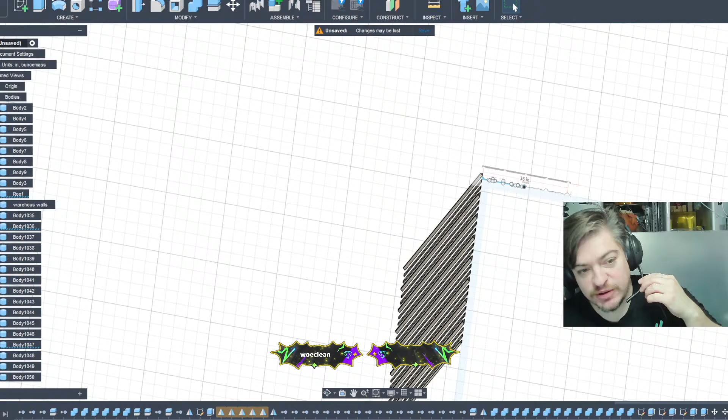We are working in Fusion 360, and I'm showing my screen here.

I have a client that wanted a copy of this building here. They make these buildings, let me pull up the webpage here. They make these corrugated metal sort of shed warehouse things, airplane warehouses possibly, I'm not sure. They want me to make it in 3D so that it can be 3D printed. Now, their website has a 3D render viewer thing, and unfortunately my HTML skills aren't that great. So when it comes to seeing if there's any way of extracting the render that's already there that can be manipulated, I don't know how. So that's something I won't worry about trying to make, just because I know I can do this, and this is what I'm gonna do.

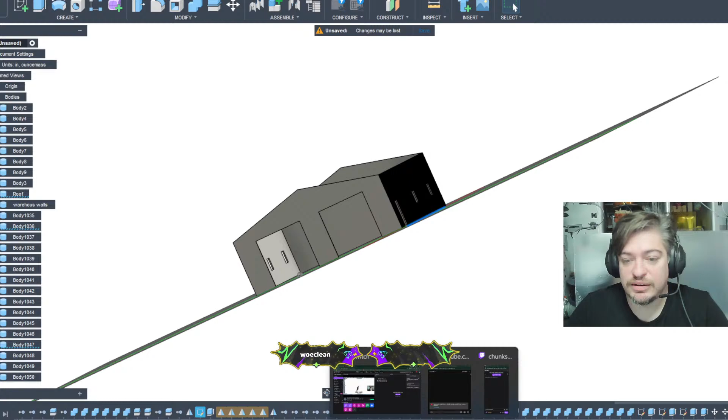You can see here, if we're looking at the interior, it has support beams every - I would say 40 inches. If the window down here is 36 by 36, then it's possible that this is 40 inches, so every 40 inches or so. So I will most likely, if that's what they want - again, I reached out to them and I'm waiting on a response - have to figure out the sizing of these beams. Now, the thing is, those beams automatically get populated into this 3D viewing.

As far as knowing the exact size of this, I'm going to have to figure it out. I'll have to count however many triangles there are, divide that by length and width, and use all sorts of little tricks to try to get the sizing correct.

So that's what we're working on. I believe the model they want me to make, they want to use as a display prop, so when they go to shows or conferences, they can have this on display to show the building they can potentially make for their clients. Of course the mini scale model isn't going to be exact, but it will be close.

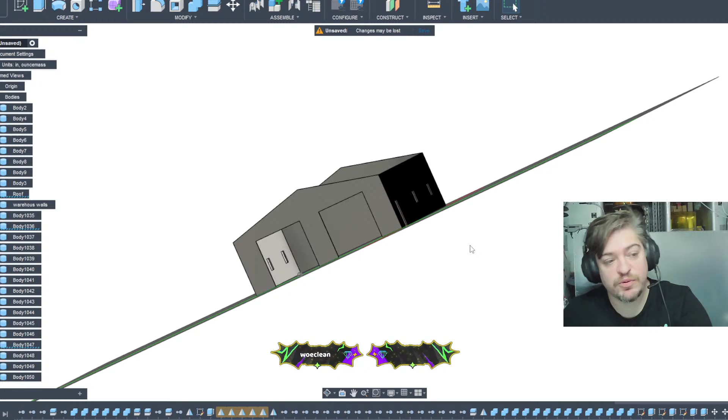So if I print this in one piece, I can print the walls at 15 inches, then print the roof possibly in two pieces, or just the roof by itself on the plate with some support underneath. Have that separate piece, glue it together, and for all the supports that are going to be in here, I can print those laying flat, one or two at a time, however many fit on the build plate, then manually glue them in. I think that's the way to go.

So there's not that much support on the interior. With 3D printing, support material takes up material and increases print time. Since I charge by print time and material usage, any way to mitigate the amount of supports needed will greatly reduce the final cost for clients. Removing supports is also a pain, so that's less work for me too, which makes things easier.

So just a little food for thought as you're trying to figure things out. That's what we're doing here.

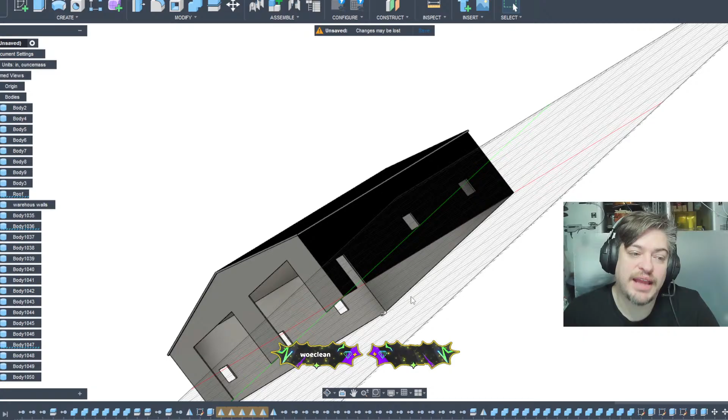Right now I'm adding the corrugated texture to both the front and back of the building. I've already added it on the left and right sides and the roof.

Here's a little trick. If I still have the page up... I don't, but I'll pull up the history here. We are looking at—it was Temu—corrugated roof panels. These are at Lowe's. I was looking at the 3D render, the 3D model they're viewing, and I thought, crud, this doesn't give me dimensions on that.

You can see it doesn't say dimensions in the description on the right hand side, it doesn't say it anywhere. So what I did, using the power of the internet, a Google search, I found Lowe's has corrugated roof building panels, or ribbed steel roof panels, and they give you the dimensions, but also the exact styling and sizing.

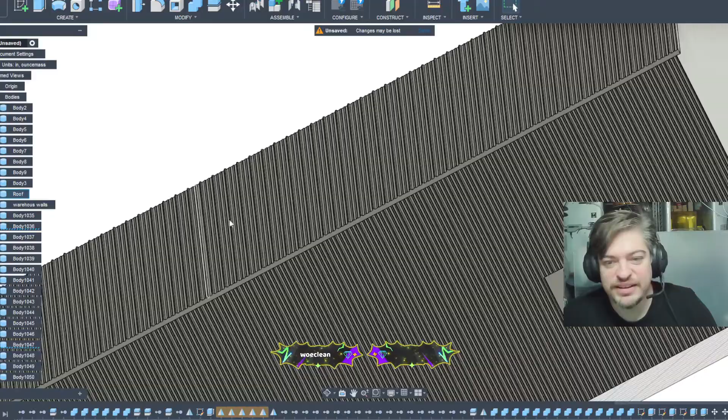Boom, baby. You can see here, I went through, got the corrugated dimensions from that site, put in the values, extruded, copied, duplicated, repeated, flipped, warped, made copies. After duplicating everything, I went ahead and fused them to the existing base that I had already sketched out. And now we have this.

So I did that to the walls as well, because the walls are also corrugated, right? So I still have to do the front and the back side.

Now, for visibility's sake, just so my computer doesn't explode. Look at that, can't even see. That's like when you have too much topology in a 3D model, and they're like, are you gonna use it for a video game? It's like, you can't use this for a video game, it has too much detail. The topology and the number of pixels and triangles on an object make the size of the object larger. The larger the object size, with more detail, the more computing power it takes to render that object.

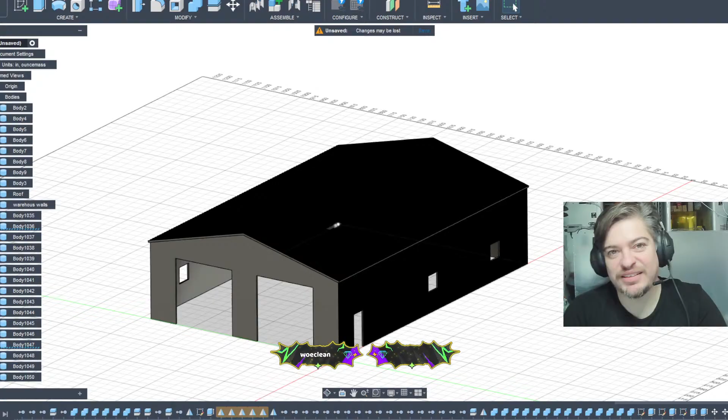So if something like this was in a video game, it would take a bit to load in the background, especially if it's just the background. That's why when you see video games, they have the flat image of what it should look like, right? And if you don't care, it's just a picture, just a drawing on a flat surface, and that's to mitigate things like this.

I know over the years, as technology gets more advanced, they've been working on Unreal Engine 5, figuring out ways to add more triangles without adding the triangles. It's a big thing, but that sort of information helps make things like this highly detailed for the future. Just imagine going into a video game and you can actually see shading on each individual panel, each individual little blip. That's big gazoogas right there.

So let me pull this print off my 3D printer and I'll start another one. I'll actually pull up a 3D printer view in the corner. But let me get that started here. BRB.

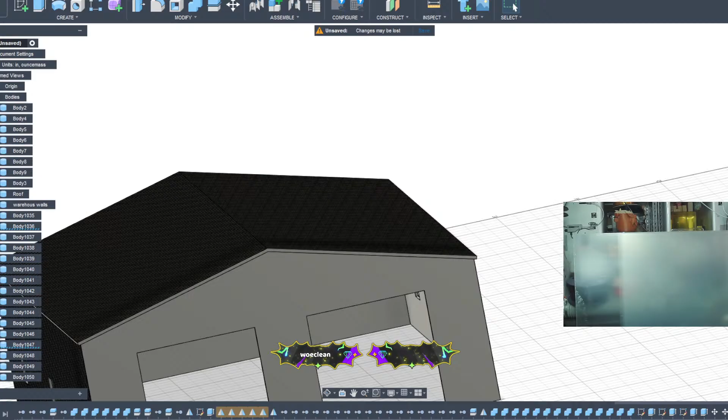I'm very limited on space here. Let me open this up, pull it over here.

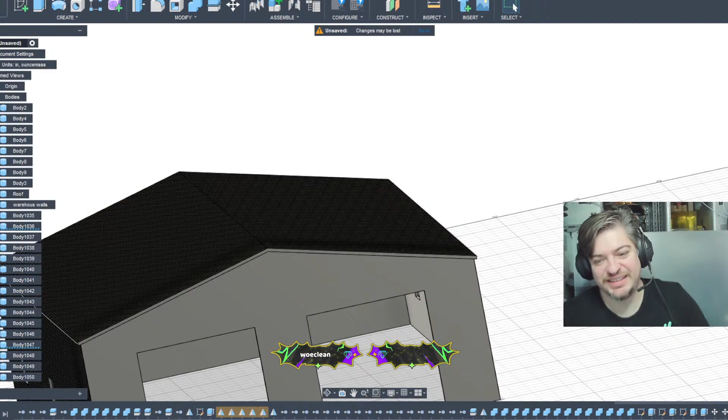All right, my bad, I got sidetracked. I was updating devices, that sort of stuff. Through all the updates, I've been getting a pop-up saying Windows sign-in request, and it's like, whoa, hold up, who? So I was just trying to get to the bottom of that.

What I have here in my hands, I don't like how that's printing. That probably needs force, but we'll leave it as is.

So currently on the printer, one of my older sisters, she had her house TP'd for Christmas. Somebody came and these boys thrashed her house with all her decor, and I think they were friends of the daughter. They scurried off, and in the commotion, they broke some of the lights that stake into the ground. So my sister came up to me and said, hey, can you make me more of these? This is the ground stake, and these are the copies I've been making. So right now on my 3D printer, I'm currently printing some more of these. Let me pull up the printer view here.

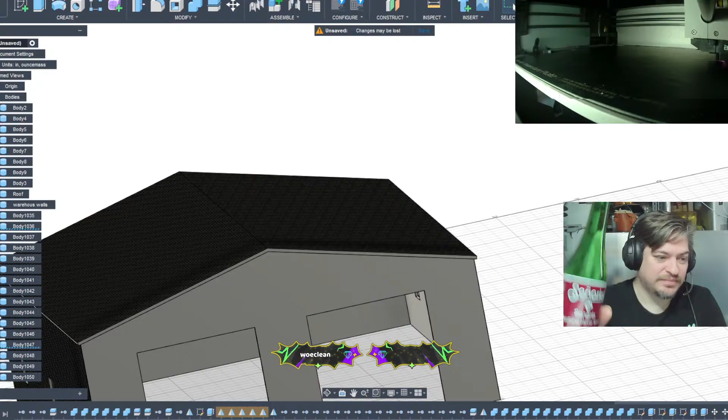I'm a little tired, I haven't had any caffeine. I woke up and grabbed a soda. I'm drinking some sangria, Mexican soda. Growing up, every time we went to a taco stand in Mexico, it was either a Mexican Coke, Mexican Pepsi, Mexican Sprite, or this bad boy. It's got kind of a twang to it. My wife doesn't like it, she says it tastes too much like wine.

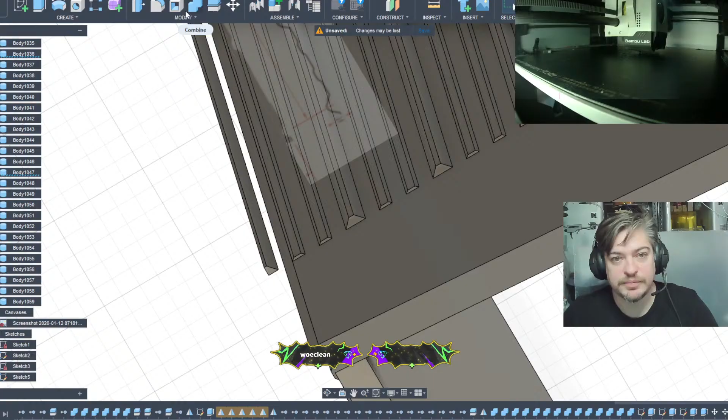Okay, so I can hide the roof and bring all these to light. And they're not even long enough, I need them to come all the way up here, so let's go ahead and do that. Come on, so extrude, start clicking on these faces here.

Okay, we want it as tall as that.

Oh no, that joined everything already. Well, I don't want to undo it, here's a little tricky thing to do. So if you look on the left side here, this wall body, the warehouse walls, are already fused into one.

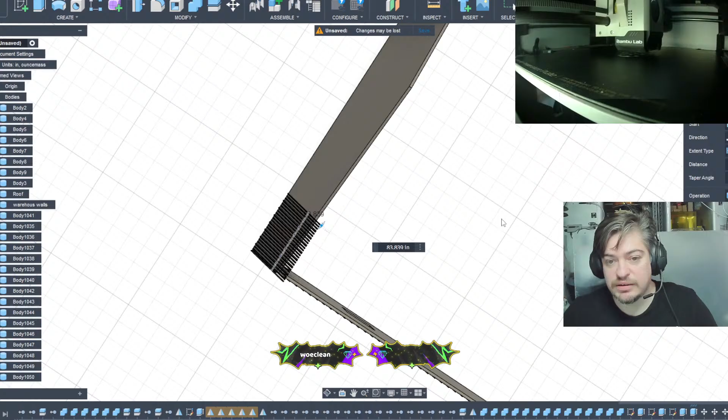Because they fused into one, what I'm gonna do is go back to my last thing on my timeline - it gets cut off because I don't want to show you my full screen - but if I click on my last job on my timeline and go to edit feature, it allows me to edit what I just did. I can tell it that instead of join, I want to do a new body. When you select new body, it doesn't do that last fuse. So now if you look on the left side, there's all the body pieces, all the body pieces. So now we're going to go ahead and just fuse these together individually.

Actually, no, that's ugly, that's ugly. Let's go back, edit feature, right? We are going to hit join. What we're going to do is hide the warehouse walls from the view. That's how you do it. So now these are all fused, and they did not fuse to the warehouse walls because the warehouse walls were not in view. Any object that's not in view does not get manipulated or edited. That's how you freaking do it.

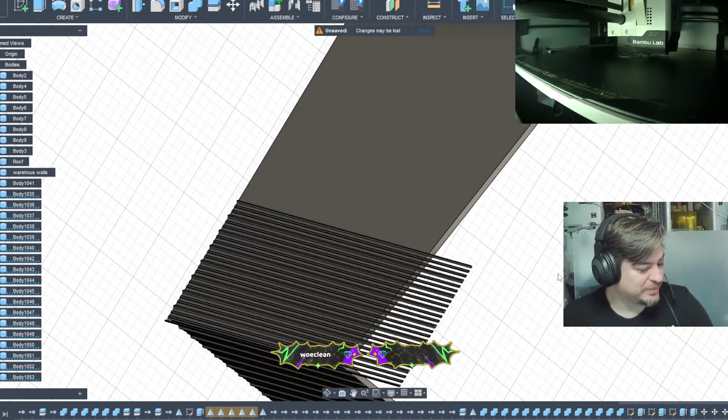Man, I need some caffeine. I'm trying to hype myself up on just some sugar. Sugar. This is what I do first thing in the morning when nobody's here. Sugar.

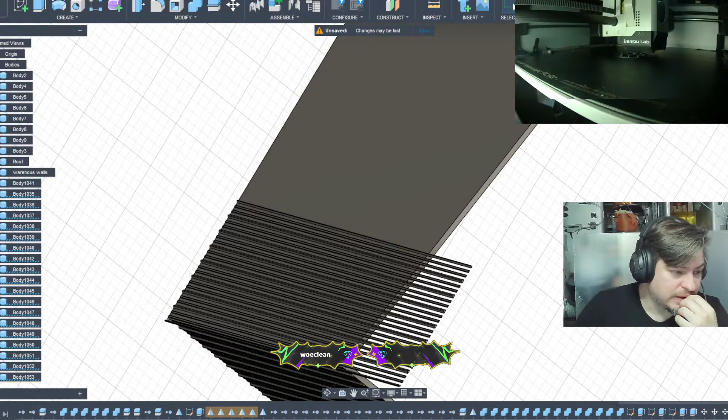Live scene close up is what I'm gonna call it. Well no, because literally any changes done to this is gonna... yeah, I don't do anything, so we'll just go in here.

So these stakes, the reason I print them one at a time is when you have multiple long standing objects, it doesn't matter how much supports and stuff they have at the bottom - what's going to happen is when the printer tip has to jump in between the objects, there's always going to be a bit of goop on the very tip. That little bit of plastic, if it cools enough in that small span, can go ahead and knock over the objects and start causing print fails. I have the time, I have the printers, I'll do it one by one at a time. I don't have to worry about the sizing or the whole 'let's max out the build plate, let's get as many as I can.' I want to do 50 at a time - I don't need to do that.

All right. Rant's over.

Let me show you how I am doing this. When I sketched out this design, I made sure that the halfway point on the topmost piece with the highest apex was exactly 9 inches from this one to this one. So now that piece has been cut in half, right? That's the starting point, it's the half.

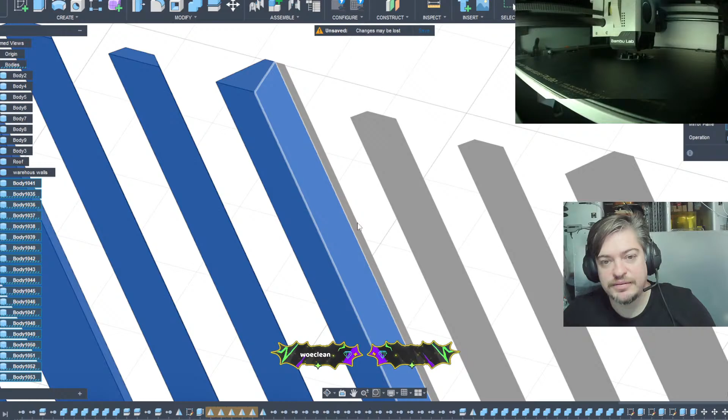I literally duplicate these. So if I come down here and say mirror, it asks you which bodies you want mirrored, and I'm gonna say all these guys, including this one. And it says, what plane do you want to mirror it against? Well, there's this flat surface here where I cut it. Click on that and boom, just like that.

I'm going to hide the warehouse walls because I don't want them to fuse right now. And we'll hit OK. We're going to do that until we have about 200 of these or more.

So we're going to do it again. Create. Mirror. All these guys. Okay, we'll just select — you hold down shift, right? Hold on shift, click on the very top object, and click on the bottom object. It'll highlight everything in between. Now we're going to select the mirror plane that we want it to mirror on.

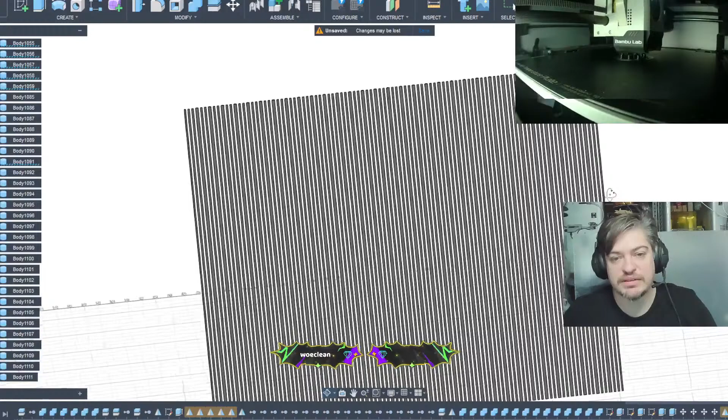Boom. Every time I join, it gives me a little error message: warning, 18 of these did not fuse together. That's because the only one that needs to fuse is the one that has that split on it. Everything else isn't going to fuse because it's not touching anything. So that's all right, we just need a mirror.

We're just making copies. So again, objects — over here, I know exactly where the mirrors start because I named the warehouse walls. Everything else beyond that are these little riblets, whatever you want to call them. Ribby-doos.

All right, let me see if that's enough for the warehouse walls, and then we're gonna duplicate these. Yeah, so that's plenty — see, that supersedes where we actually need it to be. We can actually delete some of these if we want to, which I am going to do.

Find it. This is the part that sucks.

All right, so I know it's gonna be close to the end here. If you click on an object, it'll put these little blue lines underneath it, so I can see that there it is — and that's that one, that one, that one.

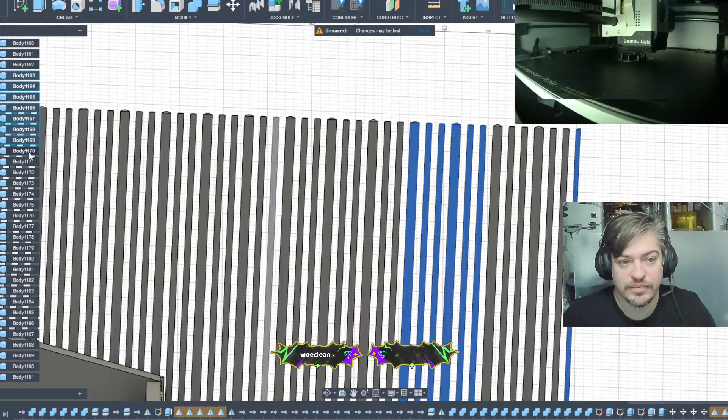So I'm holding down Control on my keyboard, which is allowing me to individually select the ones that I want. Control also allows me to skip over the ones I don't want. But right now for this sake, I'm just gonna go ahead and stop here and hit delete. So what? What? I didn't select all of them. I didn't select everything. What are you, stupid?

And find the body again. This is that. This is that. That. And that one. We'll delete those.

It normally should say remove, not delete. So I need to find out why it's doing that, because that's what we want to do — remove.

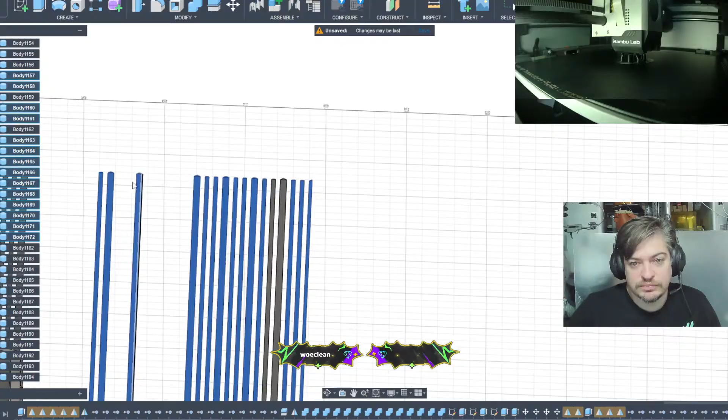All right, so we have our texture that we want to apply to the walls. Now, let's get that on the other side before we fuse everything together. So how are we going to do that, you say?

Well, what we could do is go down to the sketches and edit this sketch. And if we hide that, put a line — we're going to say from here to here. We're going to find that center point because it snaps, pull that down, finish sketch.

Now we pull the walls and say split body. We want to split this body. Splitting tool.

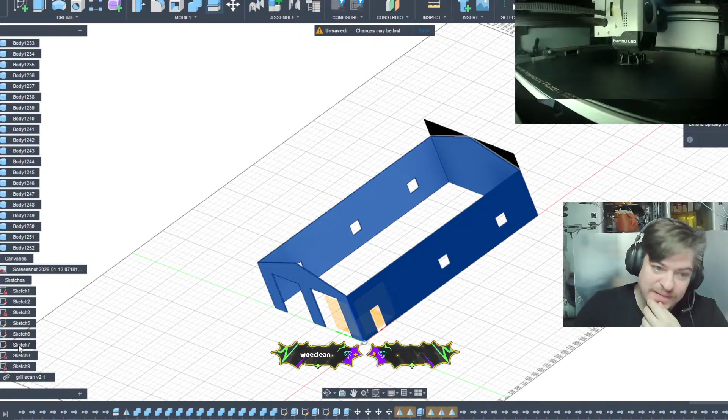We just put that line in that sketch way down here. We want to split the body by that line. See that? Boom, split it.

So now what we're going to do is mirror all of those other parts, and we're going to use this as the mirror plane. It's going to do the exact copy on the other side at the exact point we want it to. The reason you have to get that exact middle point is because if you mirror it and it happens to be off, those objects aren't going to be touching the opposite wall.

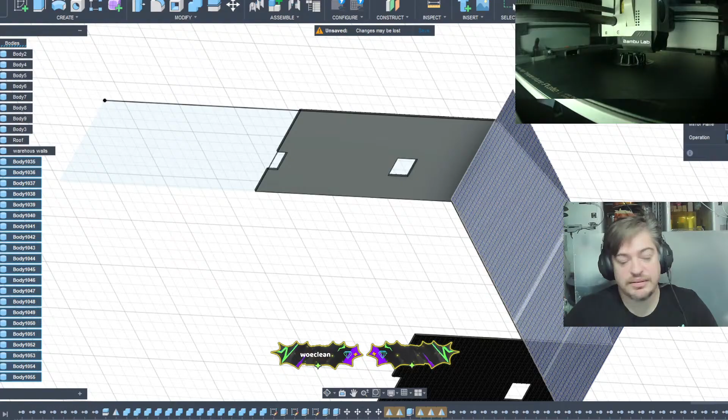So, of course, create, mirror, select the body that we want to start. Holding down shift, scrolling all the way up, all the way up. There, that has all of them selected.

Our mirror plane, you can see here, we're selecting the mirror plane that we want. We're going to say we want it mirrored based on that wall right there, and you can see it already projects them to the other side. Now I go back down over here on this side to show our objects that we have.

We can bring out the other warehouse walls and choose to join. Hit OK. Now that's going to fully join them, should fully join them to this wall. If it doesn't, we'll manually do it. Looks like it didn't do it. So it either doesn't work because it's not touching, but it should.

Is there an overlap? Yes, there's an overlap. They should be fused together. So it's probably just because of the sheer number of objects.

But I need to put this on.

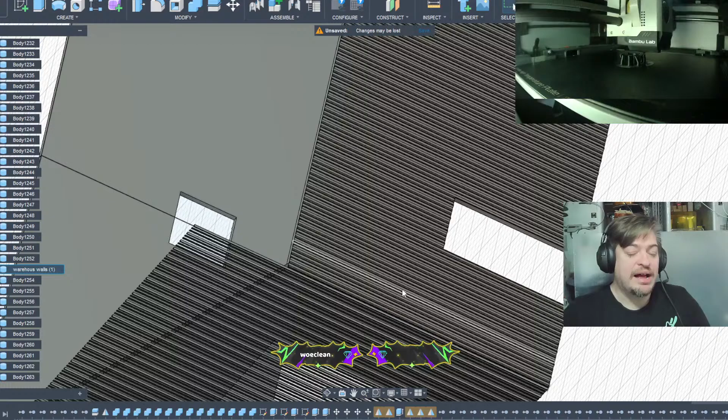Okay, so I think because of the sheer number, the sheer volume of objects we're trying to fuse together, that's why it didn't actually fuse them. We're going to do it manually. So just hit combine. We know all of the objects that are visible right now, we want to fuse them together.

I know the primary is the walls, named warehouse walls. I'll click on that, hold down shift, scroll down a little bit, select those and say okay, go ahead and fuse those together. Scroll back up to where it says the walls, click on the walls and say combine. Scroll down a little bit, holding down shift, click where I want it to stop, and we'll say go ahead and fuse those.

Why is it not... total bodies. Okay, let's do it again. Sometimes it needs to be specific, you've got to click on the right thing.

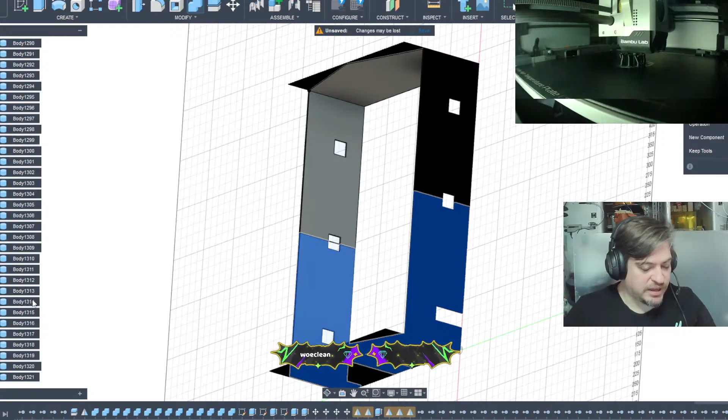Combine. Warehouse walls. Total body. Scroll down, hold down shift.

I think I know what's going on. Gosh dang it, I want to combine this with these. Just for the love of God... I gotta find it. I know what I'm going to do. Fuse the warehouse walls together.

Now they are one. Because what was happening is I was selecting the object that said warehouse walls, but it could have been the one on this side, and I was trying to fuse the one on this side with these things on this side. That's not working because they're not connected. So now they are all connected. So now if I go here...

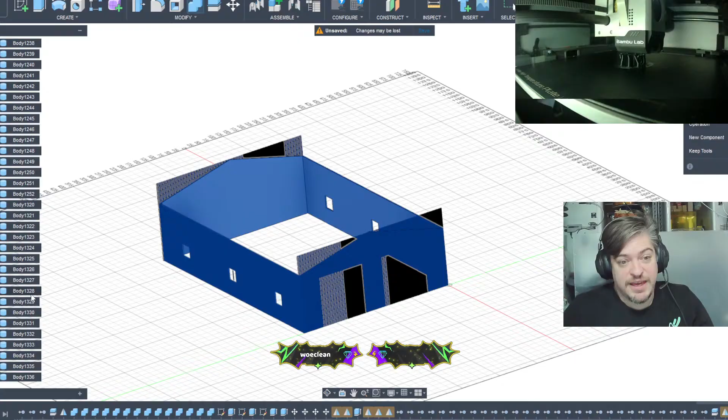Now we're getting somewhere.

But Chunk, what about the corrugated walls that are going beyond the openings, such as the doors and stuff? I'll show you what we're going to do in just one second.

Boom, see that? That's how we do it. So now, if I go here and create a sketch on the inside of this, what I'm going to do is hide the warehouse body. Going to click here.

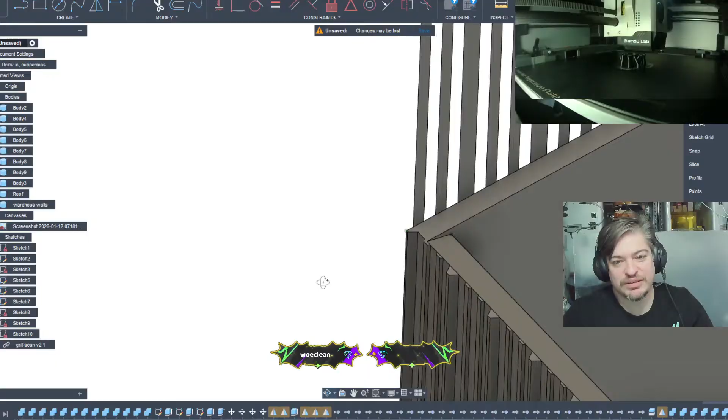Well, what I want to do is... hold on, wait a second. So it comes out all the way to the very edge. That's fine because I'm going to cut it. Yeah, it does stop at this edge. Okay.

Where are we? I had a little brain fart as to why it was coming out like this. So we'll grab it like this, grab it like that. We're going to make a bogus cutout stencil thing object, just because we want to cut out all of this negative space that's beyond the actual 3D model itself.

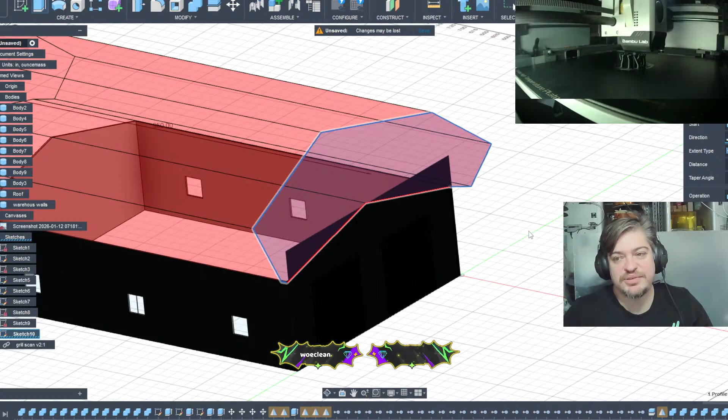So we go back, show the warehouse walls, we can grab this. We're going to extrude it, and we're just going to use that to cut everything. And because the sketch was on the inside, I'm going to hit direction symmetric. And boom, it cuts it all the way across.

Now, the reason I didn't use the cut tool - here's another thing. Remember how I had like 200 and some individual pieces? I fused them to get rid of all that on the body panel. Well, if I had used the cut tool after fusing them, it would cut all these and make 200 and something individual pieces that need to get removed. An extrusion completely removes the pieces that get extruded, and that's all we need.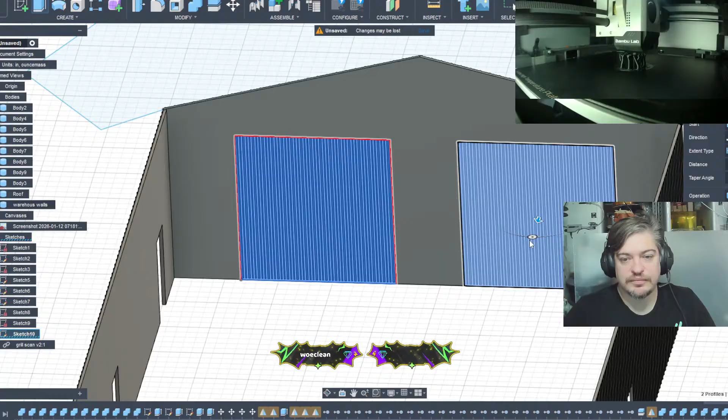So there is that - that side's cleaned up. Now let's do this side. Was that last sketch based on the door? Yes, it was. Let's edit that sketch one more time, because the sketch itself only highlights the main body - see that there? But we want to cut out the door. We're just going to put a line here to connect that. So, finish. It's not going to affect anything because every time you go back to edit a sketch, it reverts the timeline just ever so slightly - it goes back in time and redoes what you just did. We didn't make any changes to this top shape, so it doesn't need to redo the cut we just did. We know it's going to be good, but now we can come in here and cut this.

There is said opening. Hide the sketch. We have our surface on the outside. Now, the next thing for me to do on this billion pixel object is I need to start working on roll-up doors, windows, and doors.

That's just a little time consuming. So this took me - I sat down like at 7:15-ish, no, a little earlier than that. So it's been a minute. Wifey was asleep, she woke up at 7, so I started this before that - I started like at 6. Anyways, things take time.

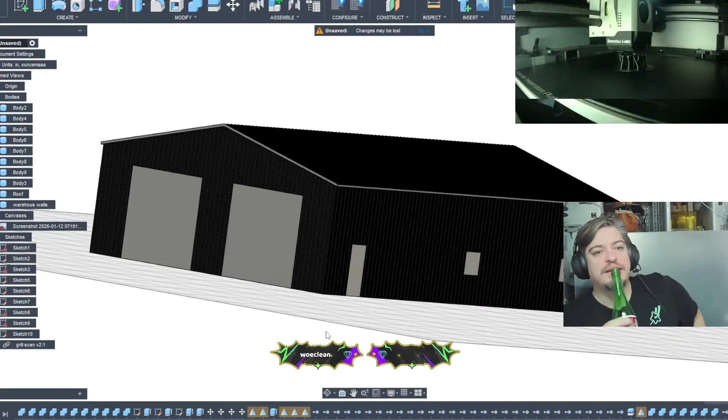Well, so the good thing about doing stuff like this and generating 3D models is once you have the 3D model, you can export them into rendering software. You can add surface textures and colors and lighting and all that stuff to make it look legit, which we might do on this because they didn't tell me to sign an NDA on any of this information.

So, looking back at this sketch here, their door is very generic - it's got a little doorknob, so we're going to model a little doorknob. Now let's Google doorknob size. We can easily see that people have already made doorknob dimensions and drawings. We want something more accurate, so we'll go with this guy - 2 5/8 or 67 millimeters.

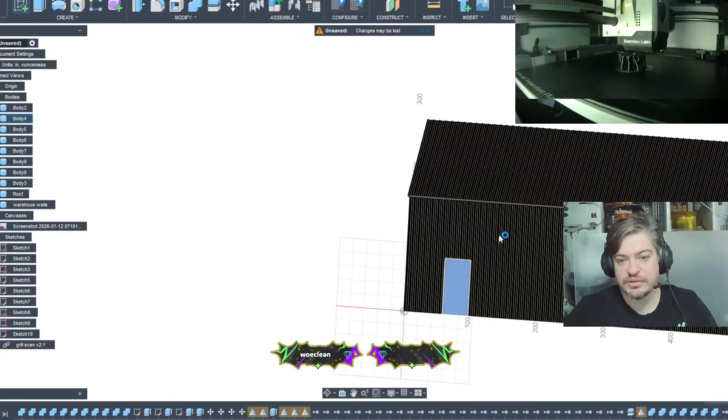Create sketch - we're going to create a sketch on that door. We can hide the warehouse walls and the roof, looking at the door. 62 - oh no, it's in inches. What was it? 2 5/8. 5/8 in, yes, 0.625. Two. 2.625.

Now again, I don't know this off the top of my head, so - doorknob position on door. Doorknob placement typically is 34 to 48 inches from the finished floor, with 36 inches being the common standard for ergonomic comfort. Positioned on the leading edge, the inside wall of the door. Vertical placement usually slightly below the door's midpoint. Horizontal placement is near the edge for easier operation on swinging doors. And wham bam, somebody's got the drawing here - so it looks like push and pull bar. We're looking for...

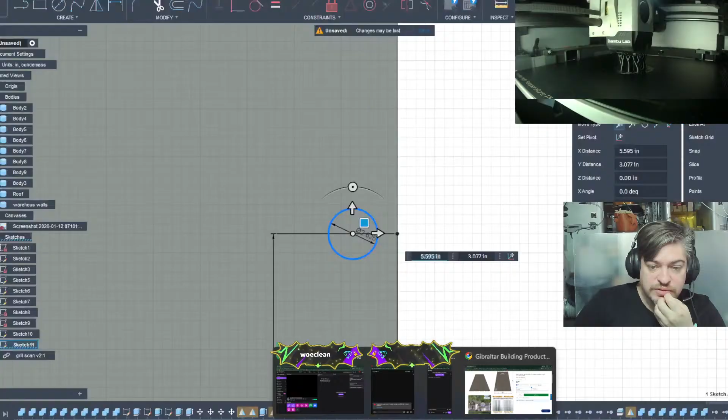So I was a few inches off. We'll go ahead and move this, grab it, pull it there. How many inches would you say the doorknob is from the... Rippy-doos? It's relatively close, I think that might be pretty good, so we'll do that. Now the doorknob might be smaller, so we'll bring that in here, and then we'll do another thing for behind the knob here.

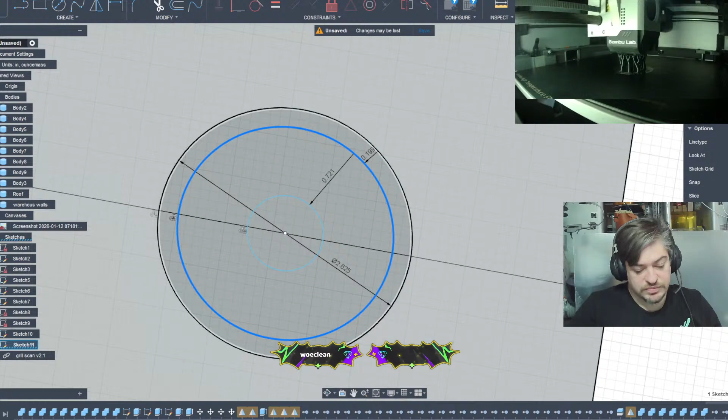All right, something like that. We'll go back to the knob sizes. So if that's 2 5/8, that's just 2 inches. So this - two. One.

And then we'll start extruding - boom, boom, boom. We will pull that up 0.25. And then we'll go back to the sketch and we'll say let's extrude that one. Let me see - it's about 2.5, so we'll extrude it 2.5, two sides. We'll bring all that up and out, and then we'll add a tapered angle. Let's take a look, see what this looks like - negative 1, negative 10. We'll leave it at 0. And then we'll do that last extrusion here. Hide.

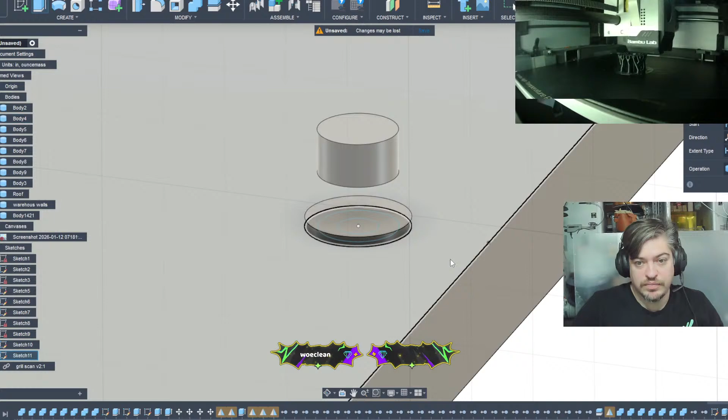There's our doorknob on our door. It's not crazy fancy, it serves its purpose, just an edit feature. When I 3D print this, I'll probably print that door laying flat just to get the knob right, but it depends on if that's even big enough to print once I export it. If not, I'm gonna make the knob a generic cylinder, just to show there is a knob there without actually having a door.

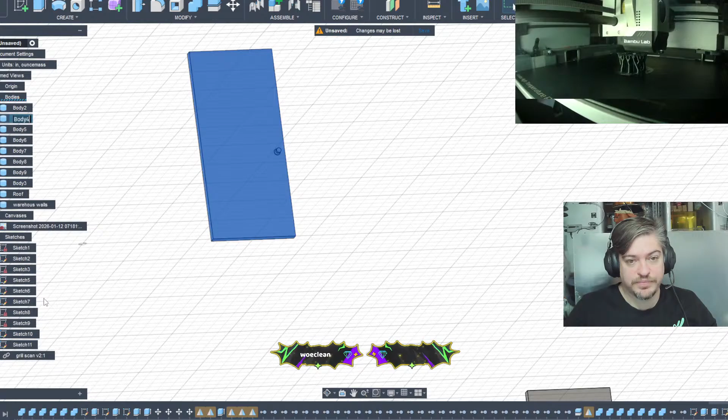So we'll rename that. Oh, look at the sketch, look at the body. Rename it door. Hide the door, don't need to see it no more.

Let's take a look at the window. We'll rename it window. Create sketch. We can hide everything else, none of that matters.

Now let's go back to theirs - what is on this page? Their viewing thing. Their window pane is one of those sliding ones. See that? It's got the one window on the outside, the one on the inside. It slides up. We need to try to replicate that. So let's see here.

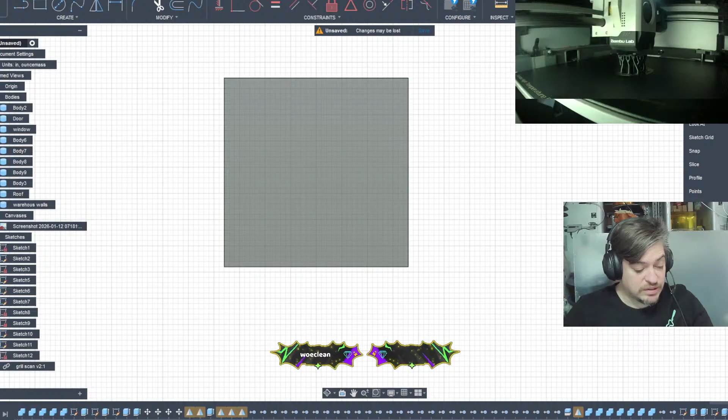Now there's a little hack, we'll try it out right now. Insert canvas from my computer - I took a screenshot. Want it here. Oh, my canvases are hidden.

And this is just to get the general sort of size for it, right? That's good for me.

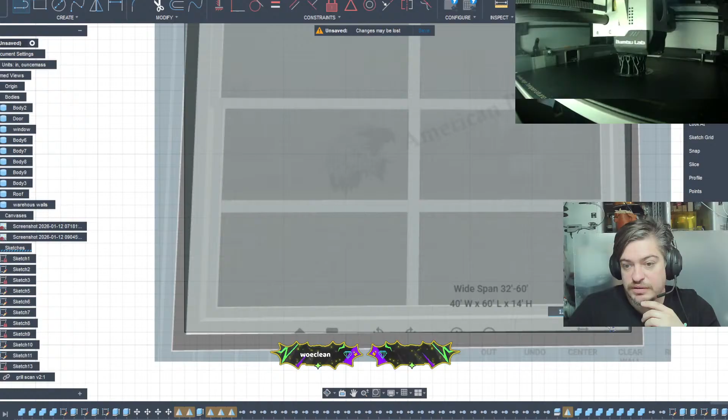So now, create sketch on here. I don't care about the center point, bring it back over here. We'll look at this corner here, measure it down, it's about 2 1/4. That's 1. So this is what we'll do - about 1 inch for that initial border, and then we'll bring it in one more time, 1 inch for the secondary. Find the midpoint - midpoint is there, and then it extends that by 0.25. Bring that, slide it across. Get rid of this.

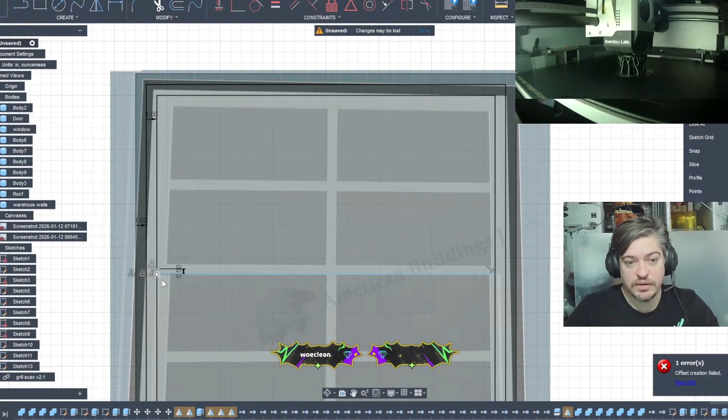Right, we have our outside border. What's that? We have our inside border, which is actually part of the window already. So that in inch mark, that's right. Let's draw it 1 inch. And then midpoint. Mind you, it's a little crooked on that screenshot. We'll do another inch.

So now we can hide the canvas because... let's do the canvas on it. We'll trim this, we don't need those extra lines. And we need a midpoint on this guy, and a midpoint on this one. So we'll go to midpoint here - it's here. Straight across.

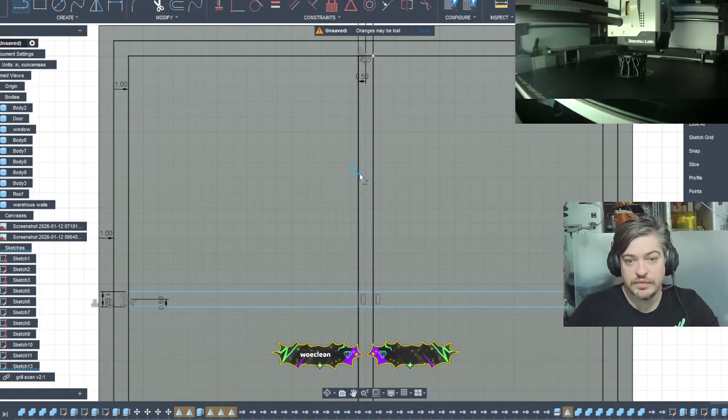Nice, I'm just doing a live stream, you know, working, doing 3 things - eating breakfast burritos. Nobody watches my content anyways.

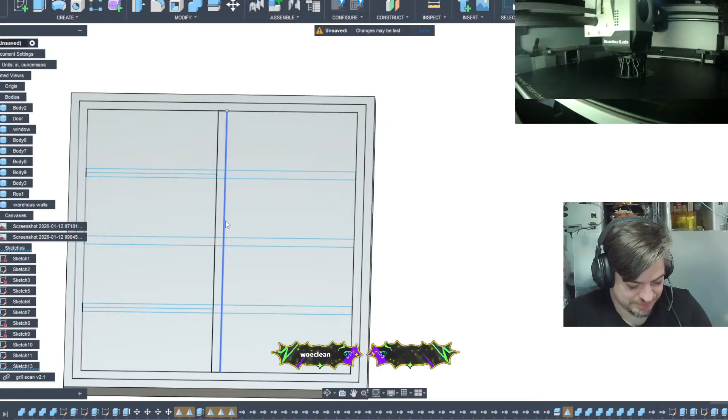Trying to think what's the best way to cut the window. There's gnats in this house.

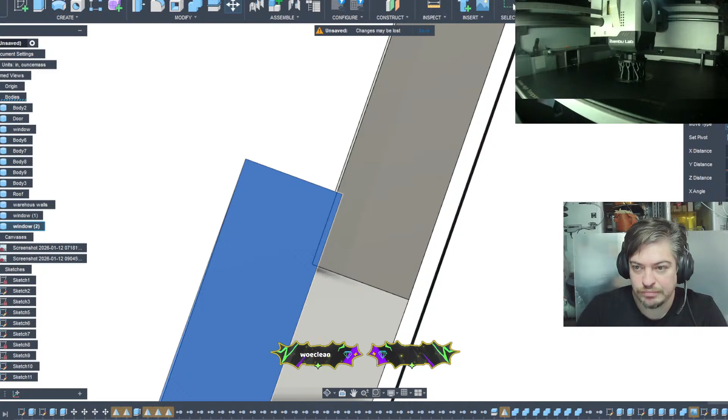There's our overlap. There's our window, and there's a frame that holds it. Now the only thing that's important is the outside, not the inside. So now I can actually get this, use it all together in one piece, because the window don't need to move. Let's show all these. And now I'm going to go ahead and throw this actual window around where all the other ones need to go.

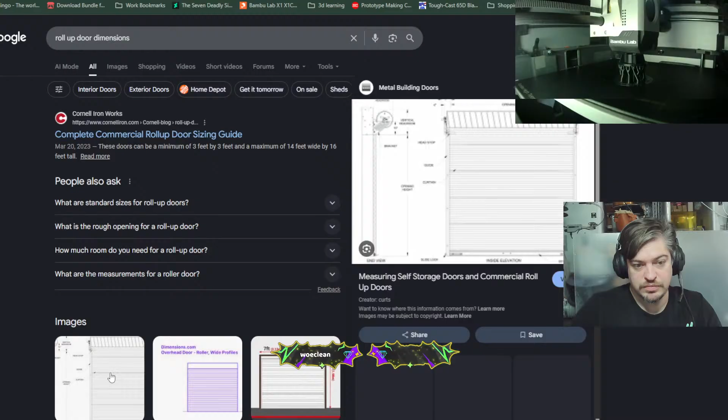Roll-up door curtain, right? Roll-up door curtain dimensions depend on application. Industrial PVC strips or solid metal fabric, but generally the curtain width needs to be wider than the opening, often 6 to 12 inches total for overlap and full coverage. Height covers the opening plus hardware allowance. Common strip widths range from 6 to 12 inches, thickness varying by temperature usage. Standard sizes exist, but custom dimensions are up to 30 by 30. We'll say a strip width is 12 inches, because this is a 12 by 12.

With that being said, let's edit the sketch. There's 12 inches right there. What we're going to do is add a little cube. We'll make that cube cut 0.25, and then bring this up. Not even that much, we'll do 0.15... sounds good, no, 0.5... no, less than that, 0.1. So there's our initial cutout. We'll mark that every 12 inches, 12 inches on center.

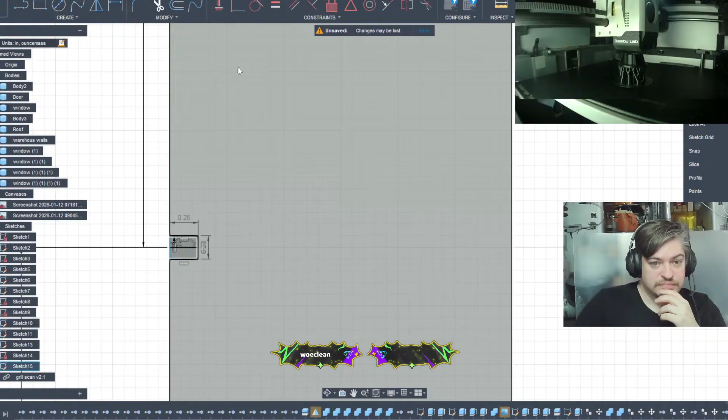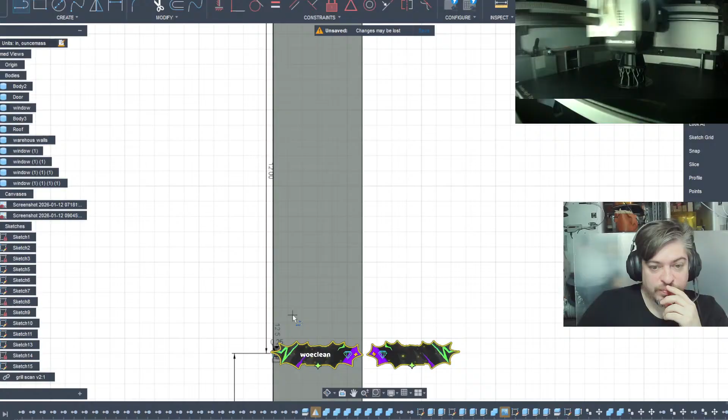I keep forgetting to do this: punch in the values, click with the mouse, instead of slamming enter. Oops, 12, and that should be 12 there. Just for visibility's sake, I think I should make it bigger. Bigger, 0.2, 0.4... it's 0.25, yep. Let's do that 12 times.

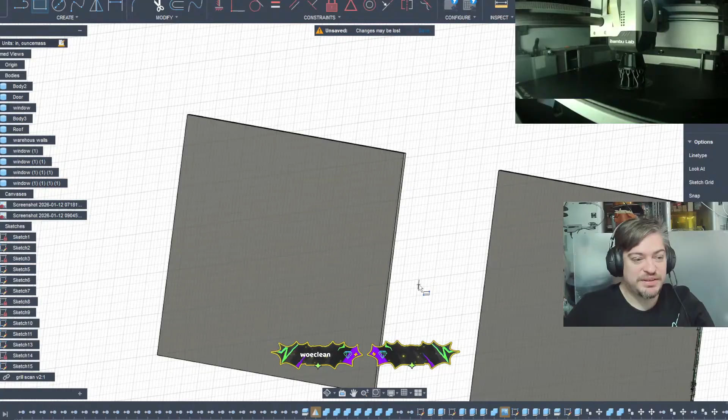There we go. So what I'm gonna do is, once I'm done creating all of these divots on the sketch, I'm actually gonna extrude it straight across and cut those features into both roll-up doors. Then the doors will be done, because that's all we need is a visual cue to say that these blocks are no longer blocks, they're doors.

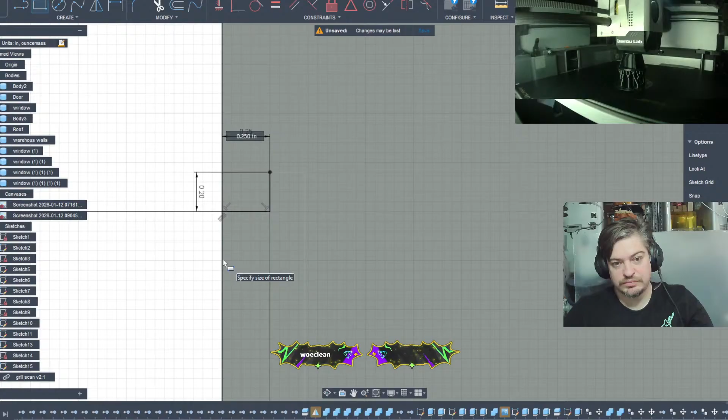We're getting there. Ooh, last one. See, this takes a little time and a lot of patience. Don't you mean patience? No? Makes sense.

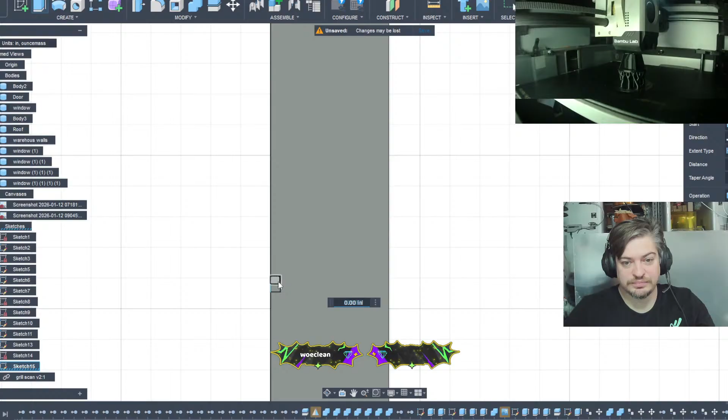There's our roll-up doors. Rename. And there is the exterior of the warehouse done. So we have the door, we have all the corrugatedness, we have the windows, we have the door with the doorknob. All of this is ready to go pretty much.

Now the customer wants to hopefully showcase the texture detail and stuff in the 3D print. It all just depends on the size. What I'll do is file, export, warehouse... spell today... warehousing. Save it to my desktop or my 3D file folder, 3D print data, 3D prints, and save.

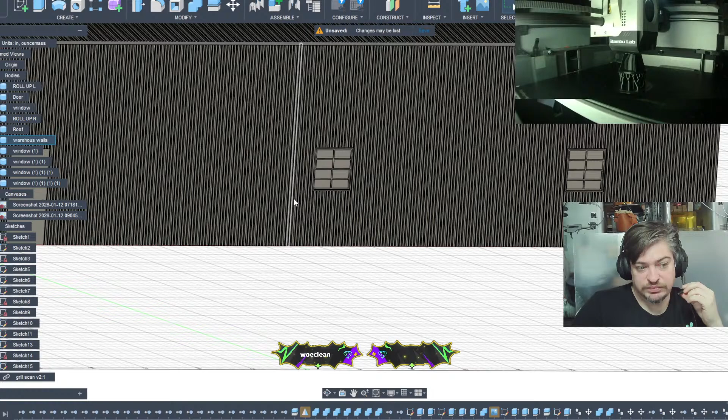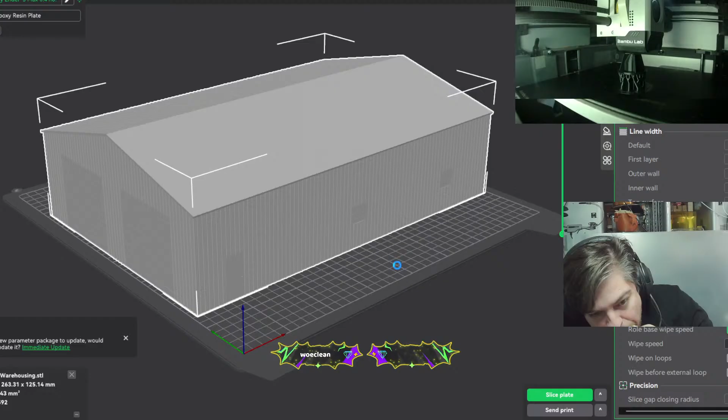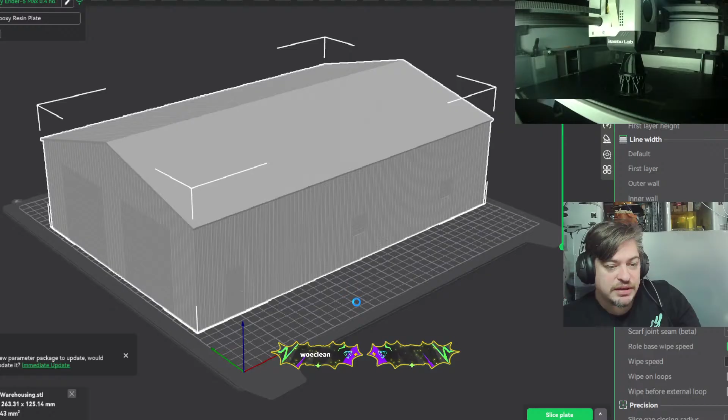So, as I mentioned earlier, just like with video games, right? The lower the triangle count, the faster it loads. The triangle count on this bad boy's gotta be pretty up there. Volume: 393,443 mm cubed.

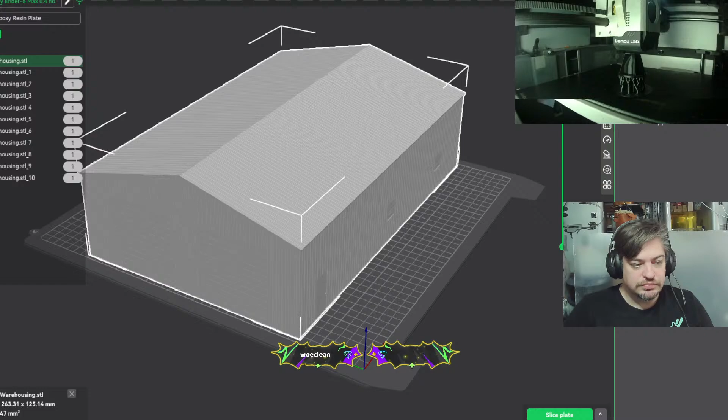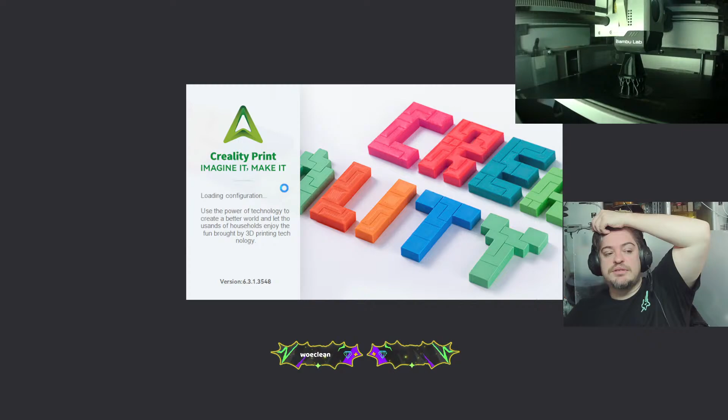So, open it again. Why does it not want to split them into objects? But I can split it to parts. Interesting. So it is still acting out. So I think, no, not Bambu Studio, still gotta be in Creality Print. I'm gonna split it into parts, move the parts around, or just delete it. Delete the parts.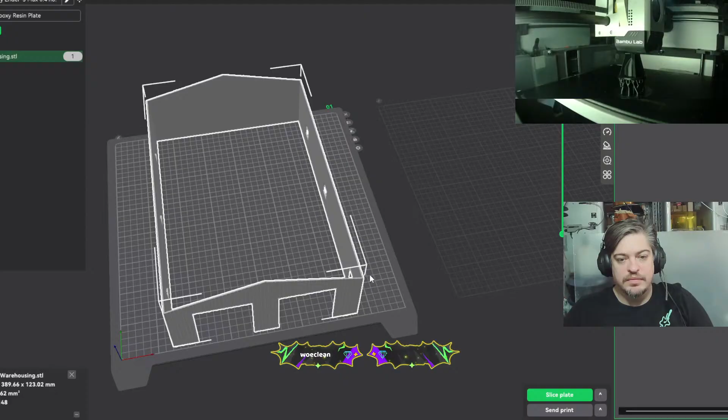Because I mainly want to see the walls, right? So coming in here, getting this model, shrinking it down, split to parts. Literally do this. Just, you know what? Let's move this. Yeah. I need this, I only want the outside walls, which is object number 6. All right, let's add support, normal, slice.

Let's see what happens. It does appear to have the corrugated effect still captured in the 3D print. You can see it does capture the little bumps, which is perfect. That's what the customer most likely wants, and that's what we can go for.

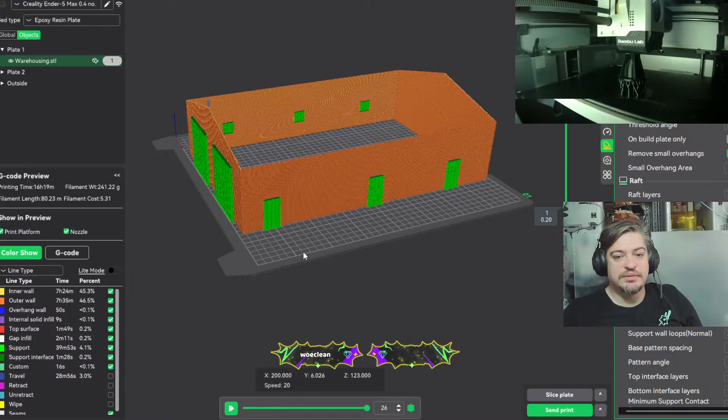Now, when it comes to printing it like this, I might still leave all the doors and everything intact, printed, and then print the roof separately, glue the roof on with all the interior thingamabobs, if that's what they want. If not, what I can do is just to hold everything together, I could print it with lighter infill, make it one solid object on the inside. It all depends on what the customer wants. But that's what we got going on for today.

So now that I know that it's gonna capture the detail, all that hard work, that painstaking hour, two hour copy and paste, duplicate and duplicate and duplicate, we're good, we're set. So again, I'll reach out to the client, see where they want to go from here.